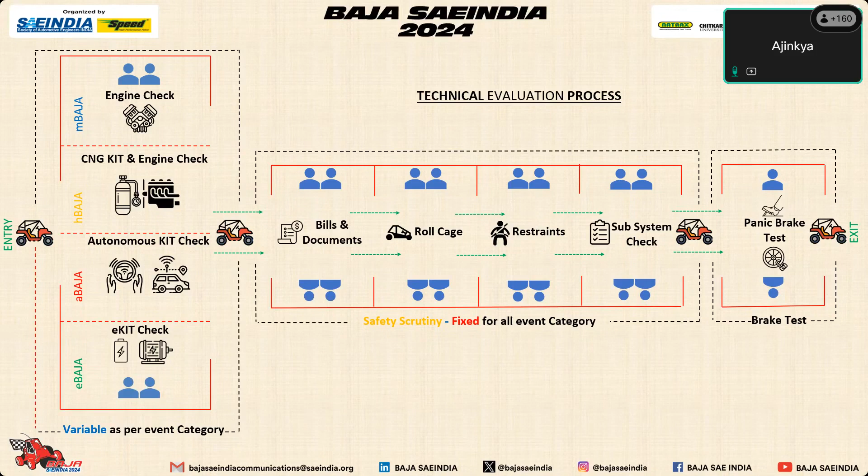This is because you get two TI check attempts, and a strategy we suggest you follow is that as you get two attempts, first get everything prepared before the TI. Your brake bleeding, etc., can be done on day 0 when you arrive. Once you have sufficiently prepared your vehicle and think there are no glaring issues, get in line for TI attempt 1, clear out max points, and report back and preferably get all the things you have messed up, all the things you have not cleared, fixed and rectified. Then on the first day itself, you can go for the second TI check, and in that second attempt, you can clear the remaining points. Because the points are carried over from the first TI to the second attempt, you can get your TI cleared and evaluated properly as quickly as possible.

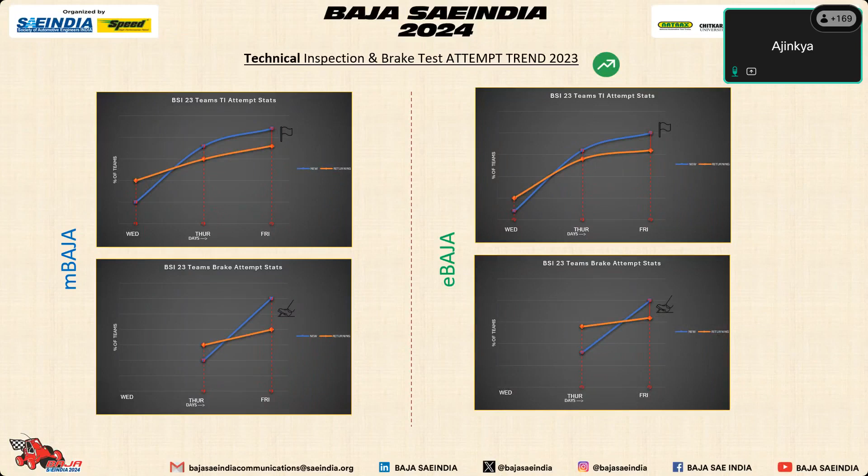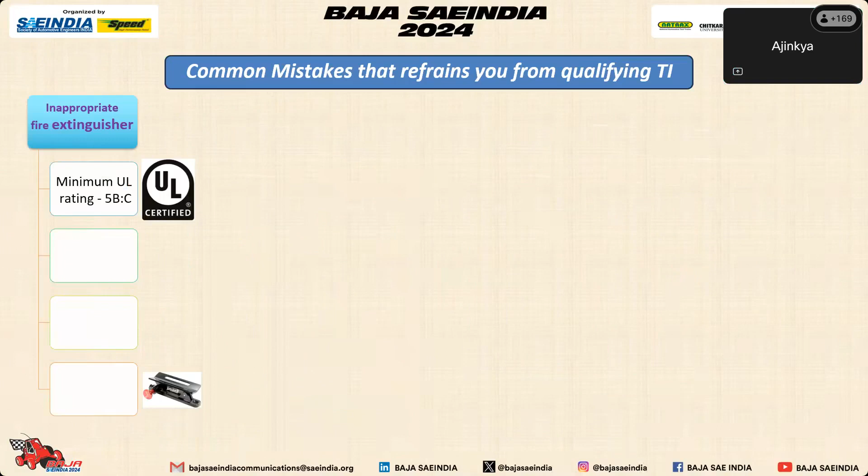Moving on to some mistakes we've observed teams make: the fire extinguisher part is being neglected. Teams should have a minimum UL rating of 5 BC, with proper pressure filled to the green dial pressure. For quick release, more than 2.5 inches of radial clearance is expected, and the mounting bracket should be Drake FireX MNT according to the rule book.

In powertrain guards, we have seen teams with powertrain guards fouling with the casing of rotary components, and flexible brake rotors without finger guards. The powertrain guard should properly meet rule book expectations. Also, having less than 15 mm of clearance between casing and any nearby roll cage member is not allowed.

Many teams we have observed do not have a proper splash shield, in which fuel that might spill over can still fall onto the equipment when poured over the splash shield. That is not expected - it is a safety hazard. We want teams to have proper sealing, grommet, etc. on the sharp edges. We want the splash shield to properly cover the entire engine and exhaust, so that fuel, whenever it spills, does not get onto the engine or the hot components.

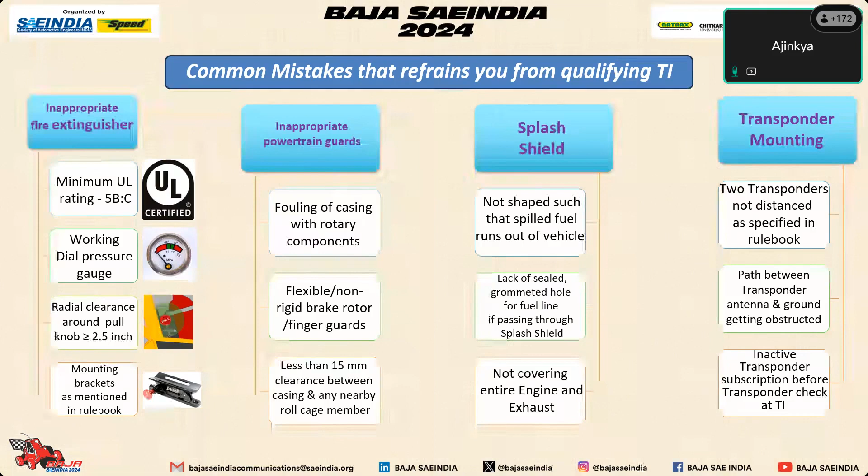Some points relating to brake lines as well - some teams do not have proper routing in their brake lines, so they might get pinched or bent to extreme during jounce and rebound, or during steering lock travel.

We also don't want there to be large cutouts in the firewall, with no grommet. There should not be any sharp edges or hazardous points for the driver, team members, or track workers.

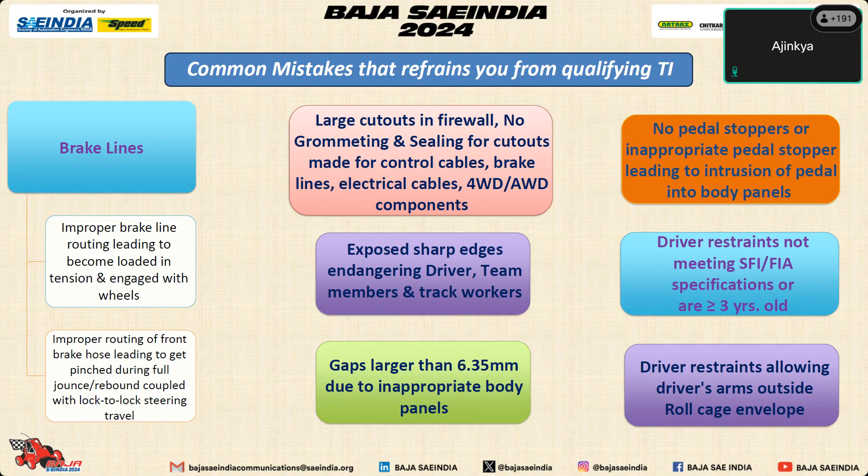Next slide, please. Ajinkya, the slide is changed. Yeah.

To provide proper thread engagement past the end of the nut. The vehicle brake lights shall be oriented to trailing vehicles and shine parallel to the ground or at a slight downward angle; brake lights angled or aimed above a horizontal plane are not permitted. No lock nuts at crucial points is also something we don't want teams to be doing. Heim rod end bearings should not be unsupported and should be strengthened using check nuts.

Accumulators are the only type of stored energy systems. We want teams to have proper PPE kits when the swapping activity is done.

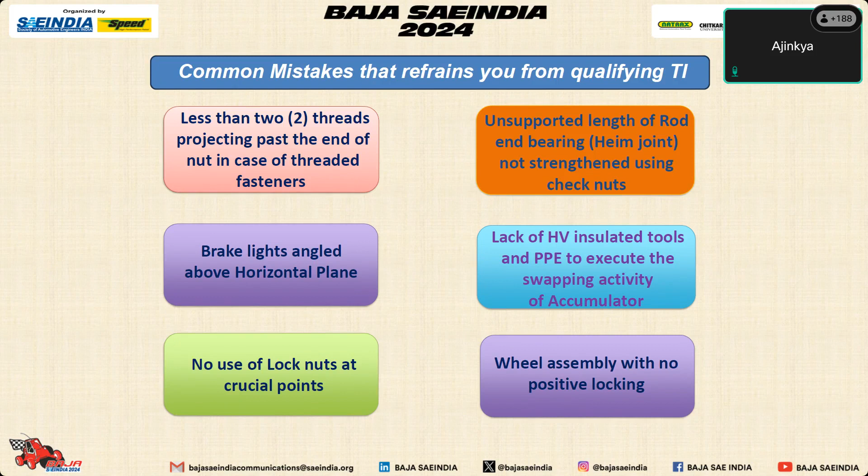In the BAJA SAEINDIA competition, this can help teams ensure that they are meeting all of the competition requirements and that their vehicle is safe and legal. Find any potential problems with your vehicle early on, and it can help you fix them.

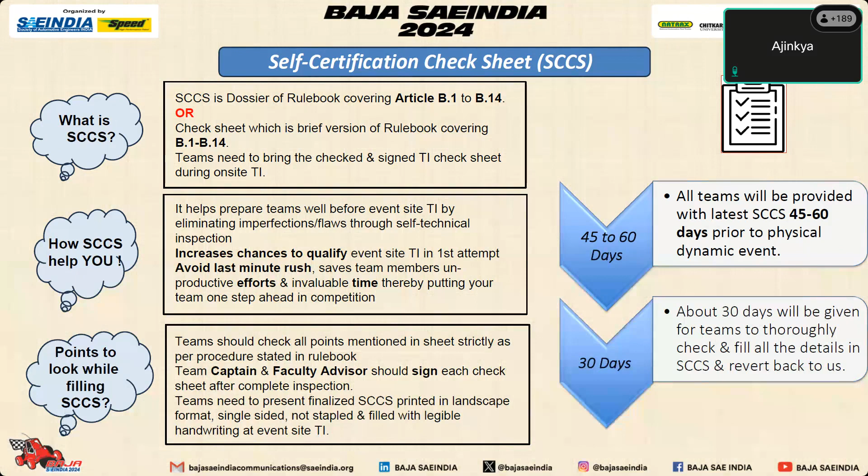Teams should check all the points mentioned in this sheet strictly as per the procedure stated in the rulebook. We want team captains and faculty advisors to have a signed copy of the check sheet, and teams need to present this finalized check sheet printed in landscape format, filled with legible handwriting, at the event site of TI.

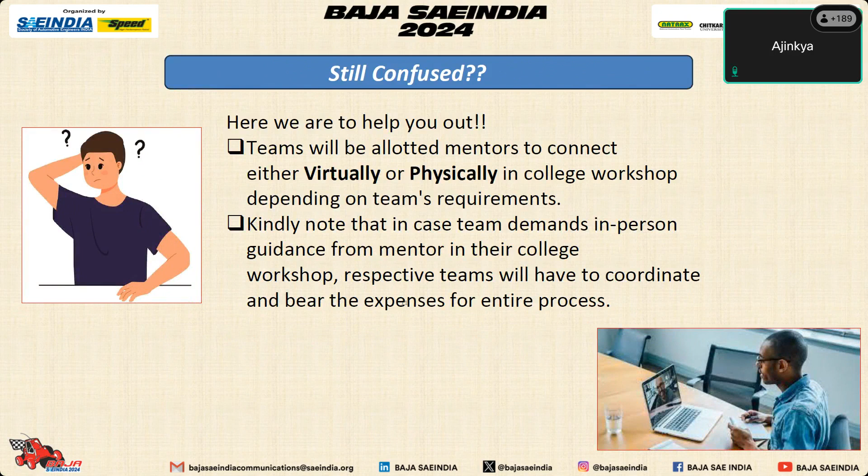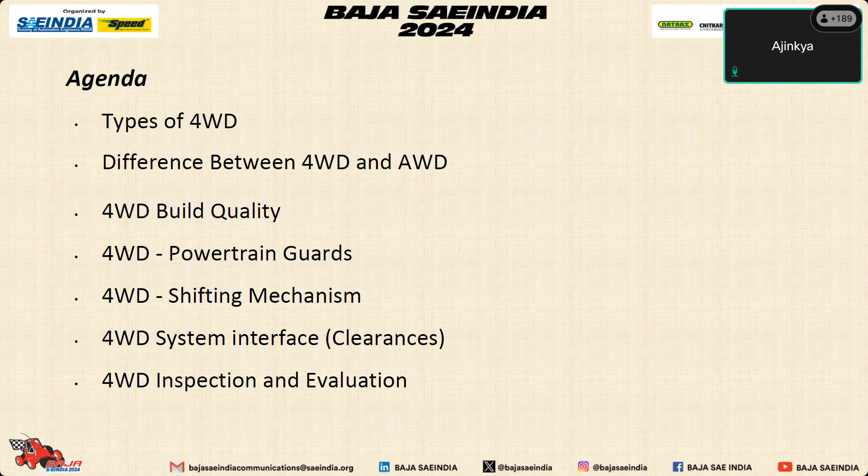The BAJA competition organizing committee has decided that it is going to be compulsory from the 2024 event for M-BAJA, and teams can choose for E-BAJA to be either two-wheel drive or four-wheel drive. We'll go over these points in the next few panels.

There are two types of four-wheel drives that we have seen teams perform: one is chain drive, one is shaft drive.

All-wheel drive and four-wheel drive are two different types of systems that we have been talking about. An all-wheel drive system is where all four wheels receive power at all times; this can provide better traction and handling in slippery or off-road conditions, and such mechanisms are typically used in cars or SUVs.

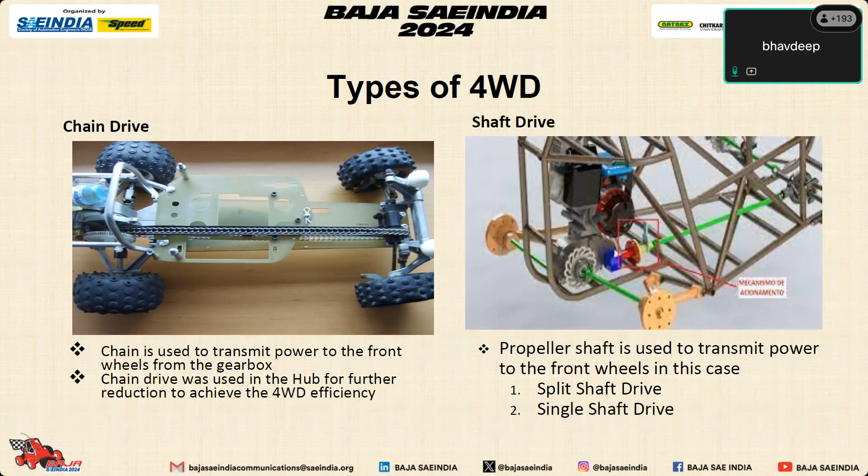So what is the difference between all-wheel drive and four-wheel drive? Four-wheel drive is a system that can be convertible to front wheel, rear wheel, or four-wheel drive. But when we talk about all-wheel drive, that is a full-time four-wheel drive only. This is the basic difference between all-wheel and four-wheel drive.

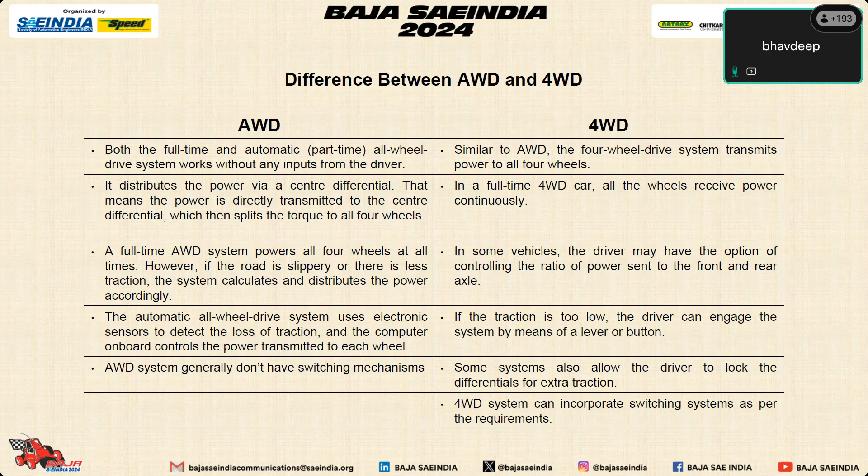There are also benefits to opting for four-wheel drive, along with some pros and cons while choosing any of the drives. For example, if you are facing low traction, you can change your traction to front or rear wheel, whichever requires higher traction.

How do we look into the build quality of four-wheel drive? The drive shaft axis should be steady. We have seen in past years that whenever teams opt for four-wheel drives, the shaft wobbles. So whenever you are designing your four-wheel drive, make sure the shaft remains steady while transmitting power, and smooth rotation should be there for all four wheels. Whenever you transmit power from rear to front, the rotation of all four wheels should remain the same. That depends on your design, and as per the rule books, you have to use standard fasteners.

And whenever you apply your brakes, the vehicle should stop. Whenever your four-wheel drive is engaged, if you face any fail-safe situation—like if the propeller shaft or chain drive fails—the safety of the driver during the vehicle operation must be ensured.

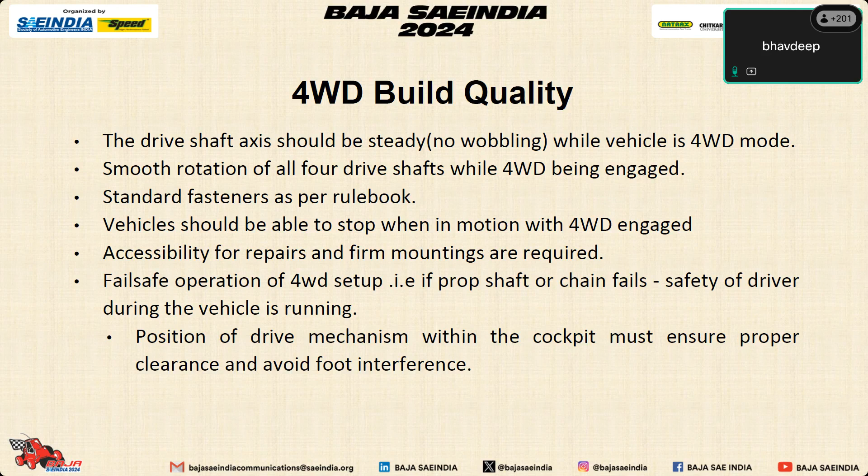As per the rule book, we have given rules for powertrain guards for properly mounting your drive shaft and propeller shaft. These powertrain guard rules apply wherever you are coupling your universal joint. Power transfer from drive shaft to front differential must be covered properly. Installation of drive shafts and hoops or chains must be ensured to ensure the safety of the driver.

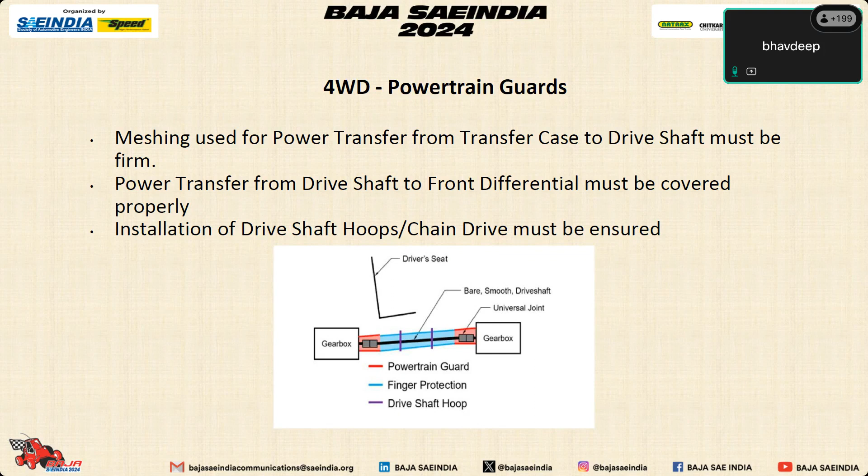Then we have given the option for a shifting mechanism. Teams can opt for any type: cable shift, mechanical type, or electronic type. For switchable four-wheel drives, there should be convenience of switching. If you have opted for a shifting mechanism in the roll cage, there should be no interference of the driver's knee or elbow with the switching lever.

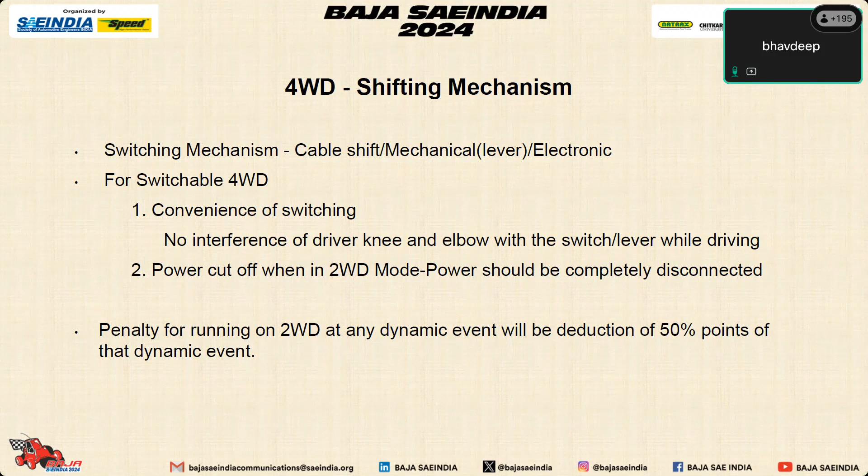Power should be cut off whenever you are shifting from two-wheel drive to four-wheel drive, or four-wheel drive to two-wheel drive. If you are running on two-wheel drive, there will be a penalty, as we have already mentioned that this year we are going with four-wheel drive compulsory. If any team is found driving on two-wheel drive, there will be a penalty—a deduction of 50% of points for that particular event.

So how should the four-wheel drive system interface look? The transaxle unit must be mounted with proper clearance from surrounding structures like the roll cage and firewall. Cutouts provided for the four-wheel drive must have proper grommet and sealing, as Ajinkya has already mentioned. Meshing and finger guards must be firm and properly mounted. These are the points a team should keep in mind while designing and building their vehicle.

There should be separation of cockpit space from the drive shaft, with clearance between the nearest roll cage member and the shaft. There should also be installation of a proper enclosure to cover the drive shaft, or the chain in case you are using a chain drive.

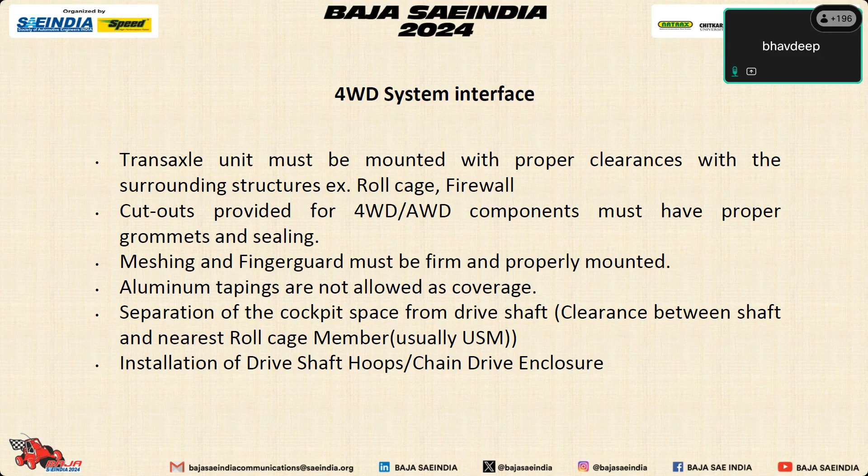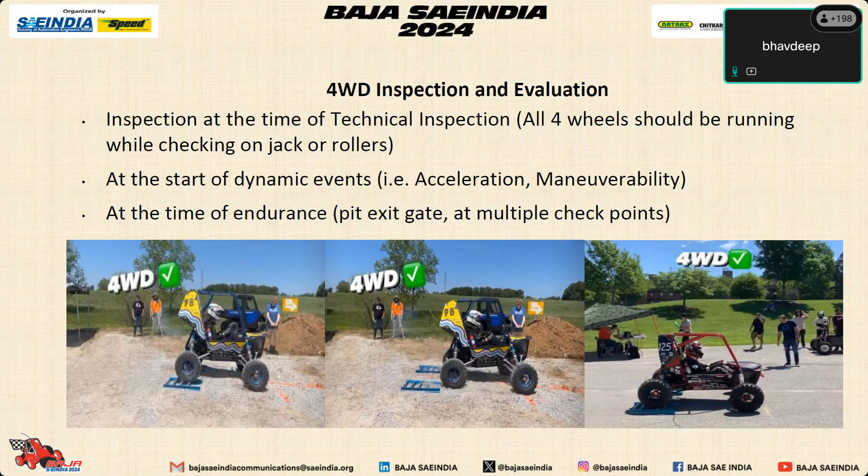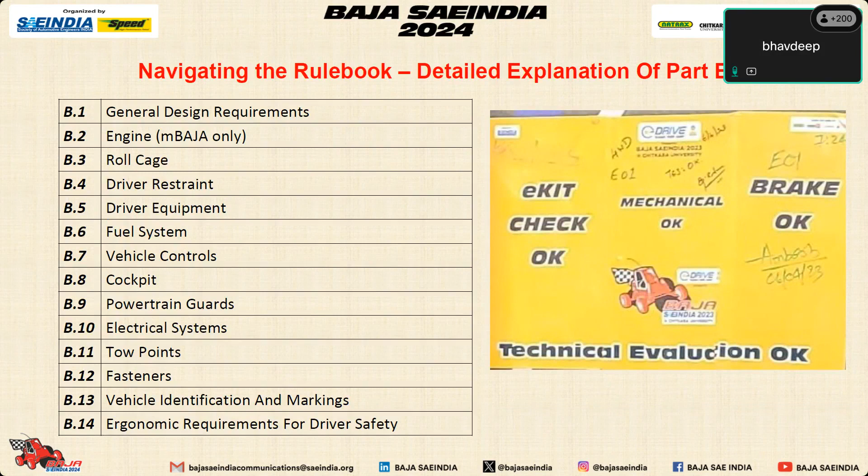Now let's go to the rule book and a detailed explanation about part B. So basically part B consists of general requirements. In terms of mBAJA, there will be engine requirements. Then what are the rules for roll cage, driver restraints, driver equipment. So all these topics will be covered in subsequent sessions.

So first we'll talk about the general design requirements. So in the rule book, what are the general requirements? So there are specific size limitations, with a maximum width of 162 centimeters; the length is unrestricted and the weight is unrestricted. So the team should consider that courses are designed for vehicles within these dimensions only.

The vehicle must accommodate a driver of 190 centimeters and a weight of 113 kg, and also meet the roll cage clearance and have accessible controls. So vehicles as designed by the students must use good engineering practice and operate safely in rough terrains.

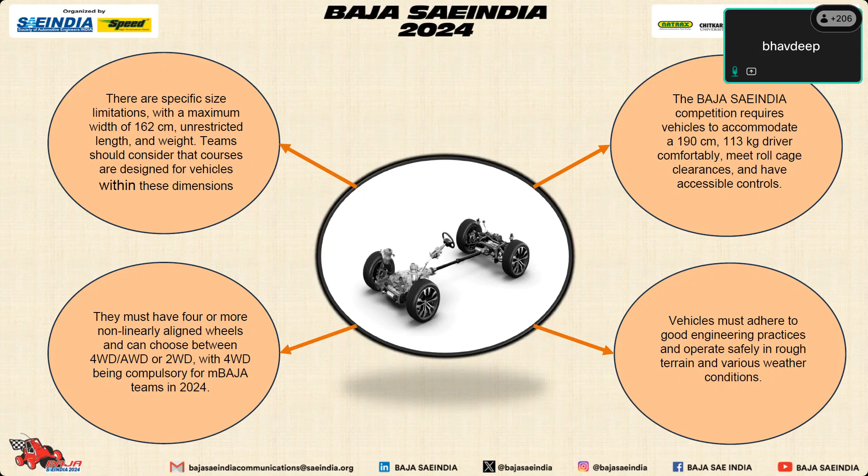So they must have four or more wheels, not in a line. You may choose two-wheel drive, all-wheel drive, or four-wheel drive. But in terms of mBAJA, four-wheel drive will be compulsory. What are the requirements for the engine? This is particularly for mBAJA.

So this year we are going to use a Briggs & Stratton 10 HP OHV Vanguard Model 19. So teams are advised not to purchase a new engine because this is a transition phase, as we have introduced two new events, aBAJA and hBAJA. So teams can use their older last year's engine as well. The only engine which can be accepted at the competition is the Briggs & Stratton model number, which is also already given in the rule book.

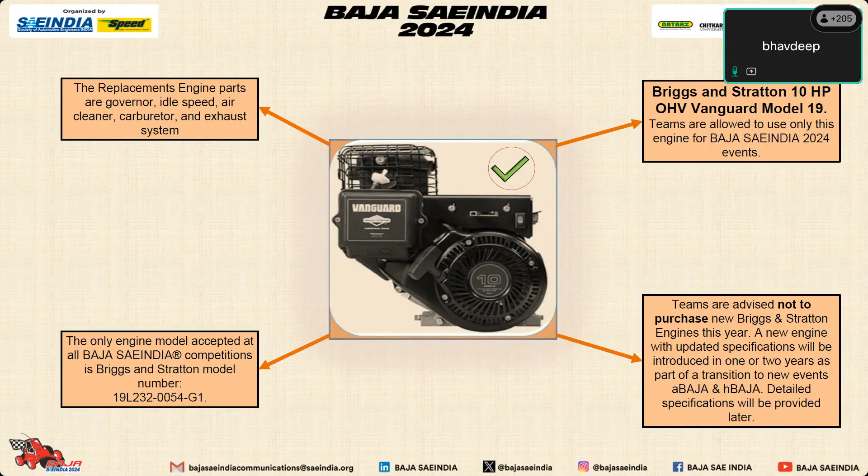So these are the ideal configurations of the engine. The complete exhaust system shall be located within the 100 mm perimeter of the vehicle. So these are the rules for the exhaust. Your exhaust should be a minimum of 100 mm away from the roll cage members.

Then the governor setting should be in hole position 5. It should not exceed the maximum RPM of 3800. It will be checked during the engine check as well as after completing your endurance. And your idle speed recommended by Briggs & Stratton is 1750 plus or minus 100 RPM.

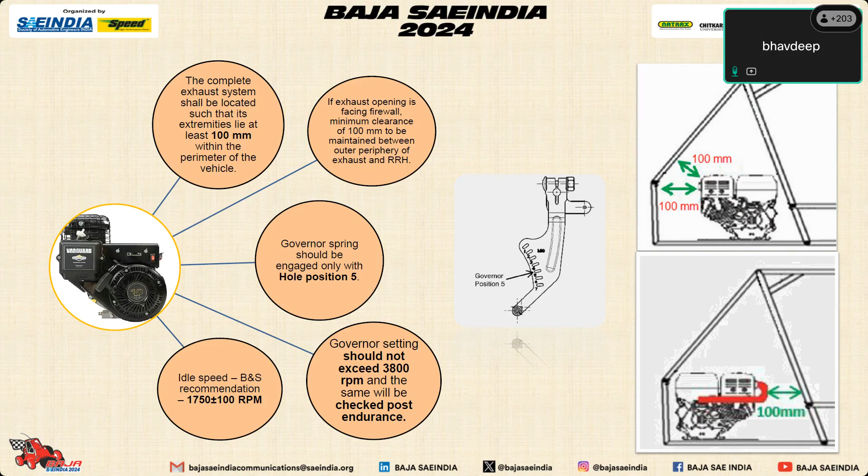Now moving towards the next session, which is covered by me, myself Bhavdeep Trivedi. I am a technical evaluation judge at BAJA SAEINDIA 2024, currently working as assistant manager at Gujarat Student Startup and Innovation Hub.

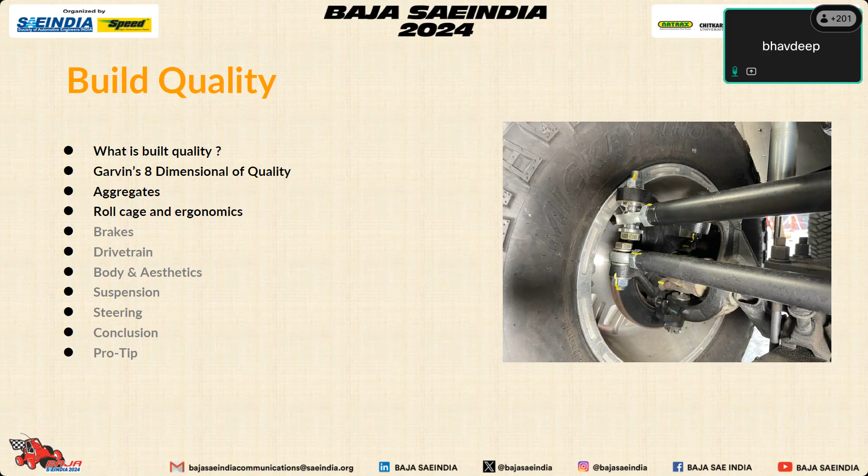Now, first, let's understand build quality. Build quality is a combination of functional as well as aesthetic aspects. Functional covers performance and reliability, and aesthetics is the appeal of the product. Both are equally important for a good build quality. The performance and durability of a vehicle depend upon build quality. Even the best design might fail prematurely if the build quality is not proper.

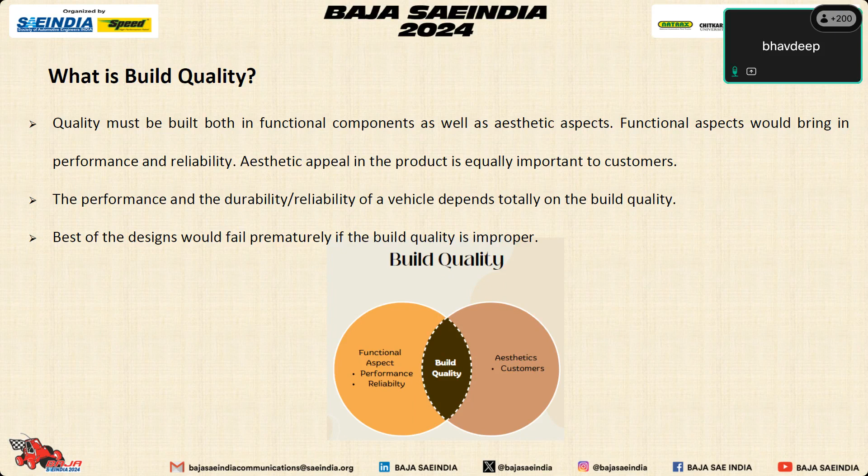Now, what are Garvin's 8 dimensions of quality? These are the most important points that all the teams can look into. These are the 8 dimensions through which you can have better build quality. First, performance: the performance characteristic describes the product's essential function. So whenever you are designing, you set up your performance. That is the first step.

Then features are the secondary part. If you are adding some additional features to your buggy, that is a secondary aspect. Then reliability, the ability of the product or service to perform as expected over time. Whenever you are designing any component, reliability plays an important role in the build quality.

Then conformance, how well you are meeting your specifications. Whenever you have decided on some specifications, after actually making it, how close to the specifications you have got. Then durability is basically a measurement of the product life cycle. Whenever you are designing any component like a knuckle or a hub, how much product life cycle is there?

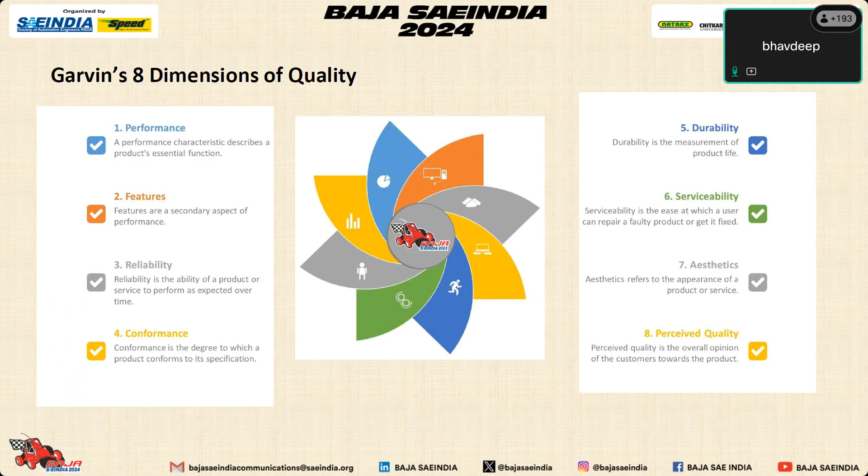Then comes the perceived quality. Perceived quality is the overall opinion of the customer. In terms of our BAJA SAEINDIA, this will be the opinion of the judges evaluating your vehicle: how they look at the quality that you have mentioned.

So these are the aggregates, on which you have to be very clear about the build quality. You can focus on the ergonomics, the roll cage build quality, then the different department designs, as well as the aesthetics of your body, suspension design, drivetrain design, and brakes design as well.

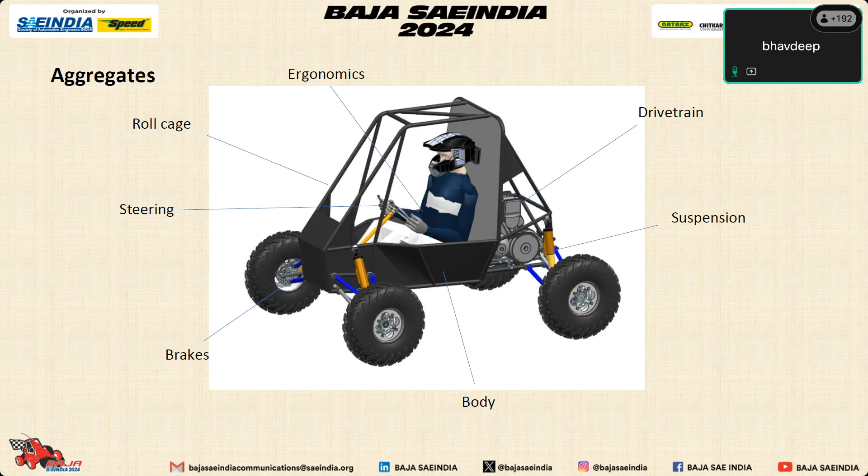Now, whenever you are going to design your roll cage, what are the points you must keep in mind? First is ergonomics measurement: driver ergonomics with proper clearance by use of the 95th percentile mannequin. This is one of the standards given by SAE. You can search for the 95th percentile mannequin and design your roll cage accordingly for better driver ergonomics.

Then the CAD design of the roll cage in accordance with the suspension hardpoints as well as the rule book. After making your roll cage design, you can go to the fixtures design, which ensures proper quality of the roll cage, and accurate jigs and fixtures need to be designed and fabricated. Low tolerance zones for high dimensional accuracy: there might be points where you need higher accuracy, which can be achieved by designing accurate jigs and fixtures.

Then you have to choose a proper welding process and proper welding parameters for the least heat affected zones. As you are doing the welding on your own, you have to be very clear while selecting your welding process. It may be arc welding, MIG welding or TIG welding, but whenever you select your welding process, you have to be very clear about selecting the parameters.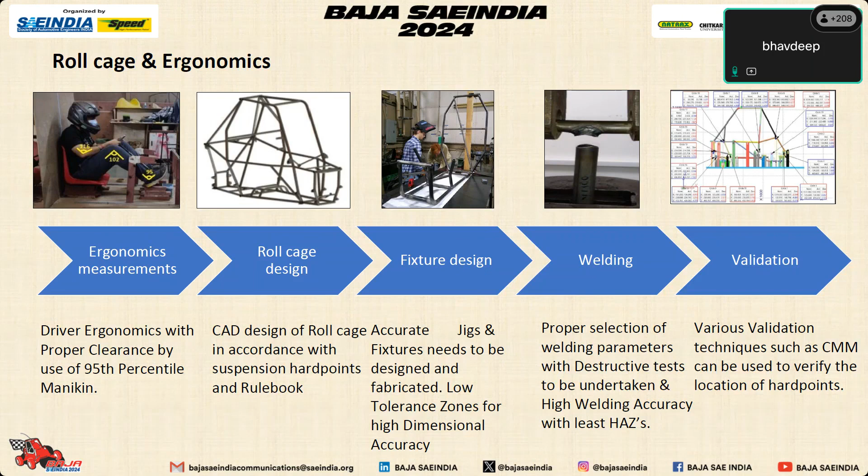Then after making your roll cage, you can validate your hard points by various validation techniques, such as CMM, that is, a coordinate measuring machine. It can be used to verify the location of the hard points. This will make your roll cage and ergonomics very clear as far as build quality is concerned.

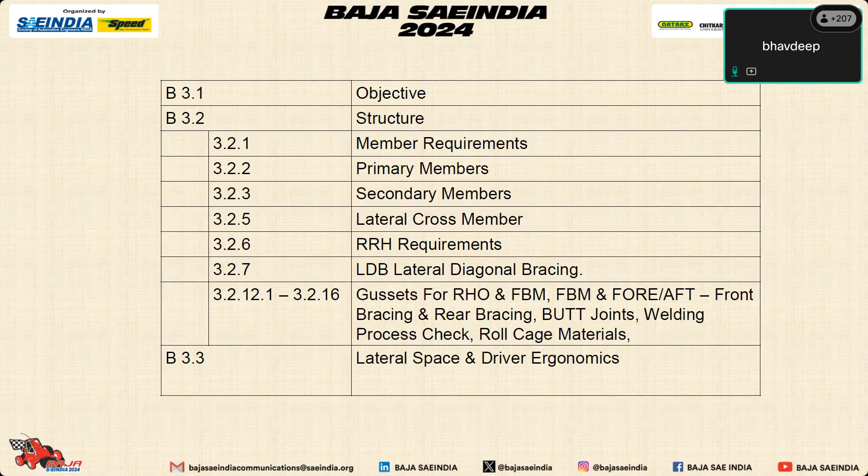Now let's come to the roll cage part. We'll briefly discuss the objective, structure, member requirements, then types of primary members, secondary members, lateral cross members and other roll cage members. First, the objective: we design a roll cage to maintain a minimum space surrounding the driver, designing and fabricating it to prevent any failure during normal operation, collision, or rollover.

These are the rules teams need to keep in mind: the roll cage should be newly developed every year. Use of an old roll cage is strictly prohibited, and a unique signature on the roll cage is required. The signature is stamped using a 6mm number punch on the driver's left side, and it contains the team ID, year of participation, and the car number.

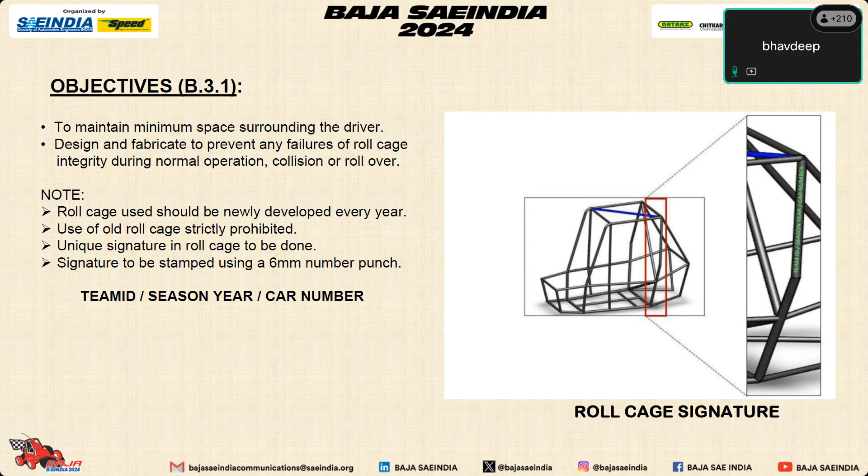Now, which type of structure can you use to build your roll cage? A space frame of tubular steel can be used. Joining can be done by welding or bolting; separate rules are given in the rule book if you opt for bolting. Welded joints must not be ground, sanded, or modified to prevent inspection. And if you are using bends in your roll cage pipes, they should not have wrinkles, kinks, or any detrimental deformation to the cross section.

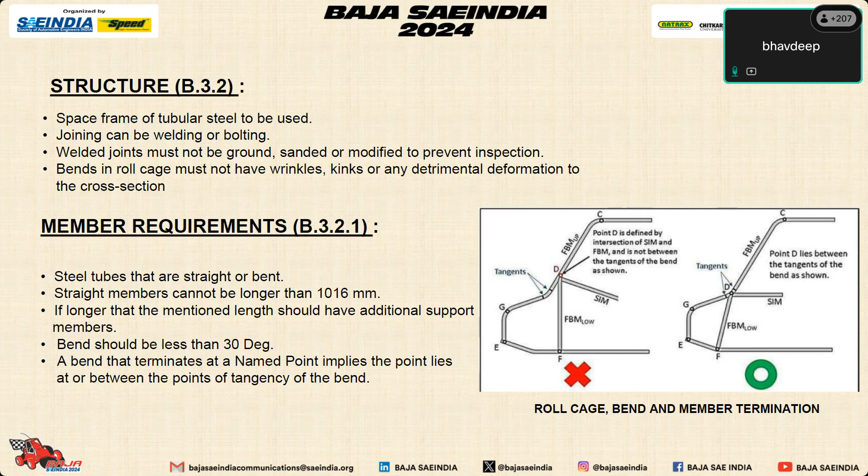Now, what are the member requirements? Steel tubes can be used, straight or bent, but straight members cannot be longer than 40 inches or 1016 mm. If longer than that, they should have an additional support member, and bends should be less than 30 degrees. These are the points a team can keep in mind while designing a roll cage.

These are the types of primary and secondary members: namely rear roll hoop, overhead, FBM, and ALC, CLC, DLC are primary members, while SIM, fore-aft bracing, and the underseat member are the secondary members of the roll cage.

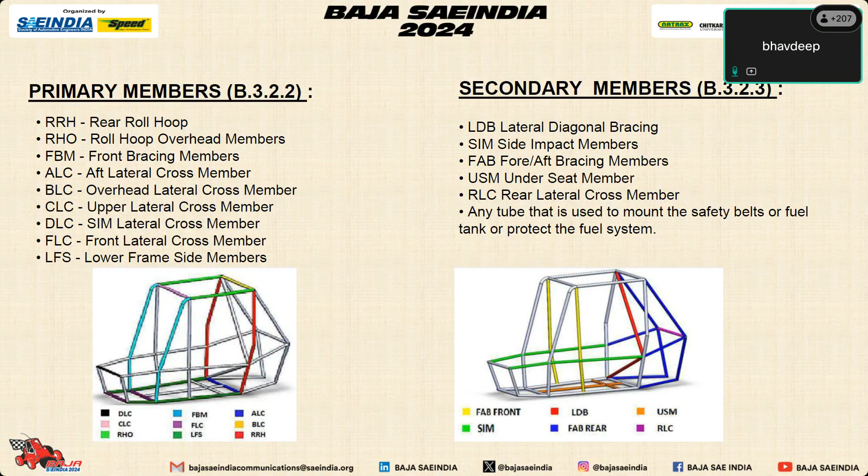So these are the important points to be noted while fabricating or designing your roll cage. The ends of the ALC member should be extended and left open for measurement purposes of the pipe cross section. Right. Any one member in the engine compartment area should also be left open for inspection. Roll cage material is to be used as per the rule book guidelines strictly. Third party certificates are required for material inspection.

All the roll cage members having bend radius greater than 6 inches must not be longer than 28 inches. So if you are bending your roll cage pipes, then the bend radius should not be more than 6 inches and not longer than 28 inches. The minor angle between two ends of a non-straight tube must not exceed 30 degrees.

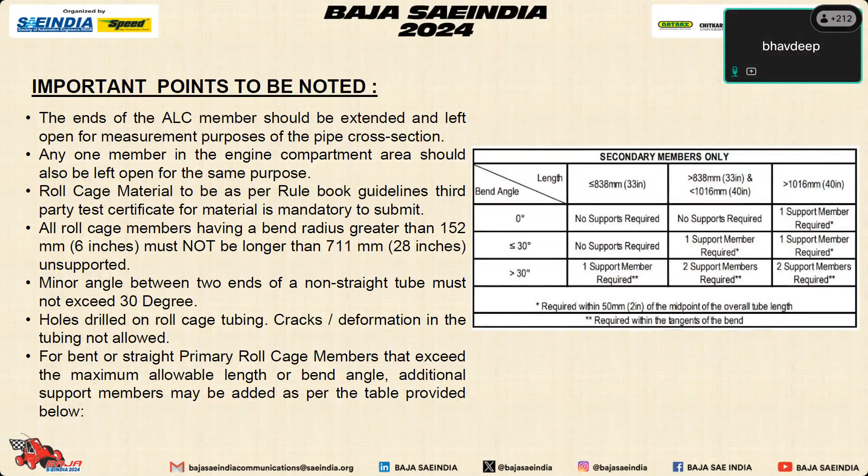So for bent and straight primary roll cage members that exceed the maximum allowable length or bend angle, there is a requirement of additional support members. This is the table given in the rule book. If your bend angle is 0 and your length is greater than 40 inches, then one support member is required. Similarly, the bend angle and length requirements are given here in the table, and accordingly you have to provide a support member.

So these are the RRH requirements. There are four rules for the rear roll hoop. The maximum allowed inclination from the vertical is 20 degrees towards the rear side. Second, minimum width of RRH at 14 inches above the driver's seat. So from the seat bottom, 14 inches up, there will be a minimum length of 32 inches. So it should be greater than 32 inches.

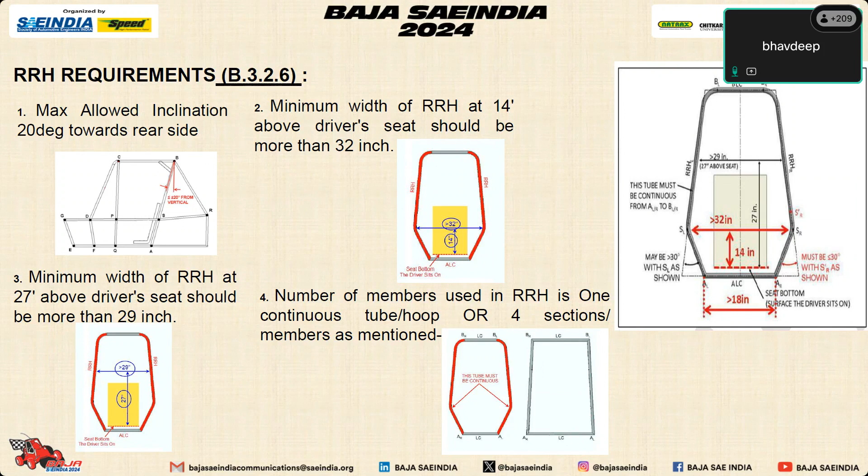Third one is minimum width of RRH at 27 inches above the driver's seat should be more than 29. So measuring from the seat bottom above 27 inches, the minimum width of the RRH should be 29 inches or more. And fourth one is number of members used in RRH. It can be a singular or a four section, but the sides of the RRH must be continuous.

Then lateral cross members cannot be less than 8 inches. This is not applied for ALC, because ALC has a separate rule of minimum length requirement, that is 18 inches. Other than ALC, teams can use smaller LCs, but they should not be less than 8 inches.

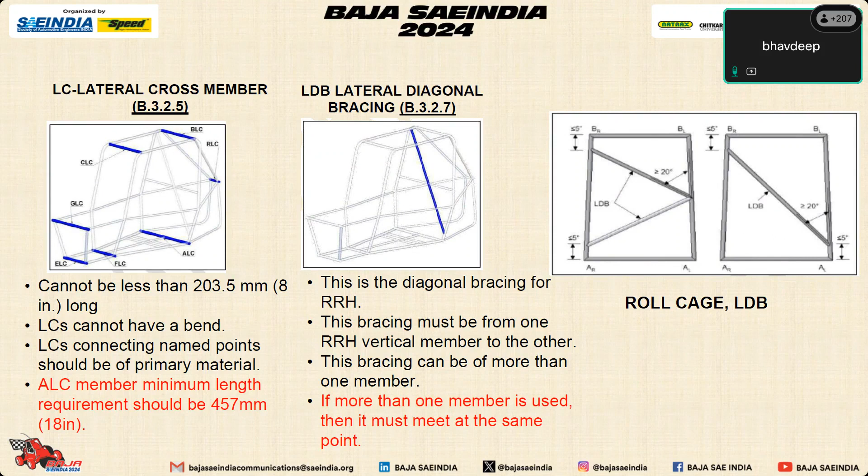Then the lateral diagonal bracing, this is a diagonal bracing for the rear roll hoop, and this bracing must be from one RRH vertical member to the other. If more than one member is used, then it should meet at the same point. The rules are given in the rule book that it should not have less than 20 degrees of angle, and the minimum distance from the B and A point should be less than or equal to 5 inches.

So if RHO and FBM are not comprised jointly by one tube, then a gusset is required. So what are the requirements for the gusset? The total weld length must be 2 times the tubing circumference, and if tube is used, then it must be a primary tube. And if plate is used, then the thickness of the material meets or exceeds that of the primary material.

So these are the roll cage templates, which are going to be inspected during the technical inspection. The teams can use the same template while making your roll cage at the college, and you can verify before coming to the technical inspection.

So these are the rules for FBM and fore-aft bracing. The front bracing member should be continuous, joining RHO, SIM and LFS. Here we have given two images of the same FBM, one having a vertical support. The maximum angle between FBM and vertical should be 45 degrees if there is no front FAB, and the distance from the FBM RHO bend should not exceed 5 inches. A vertical support from SIM to LFS is required when the distance is greater than 5 inches.

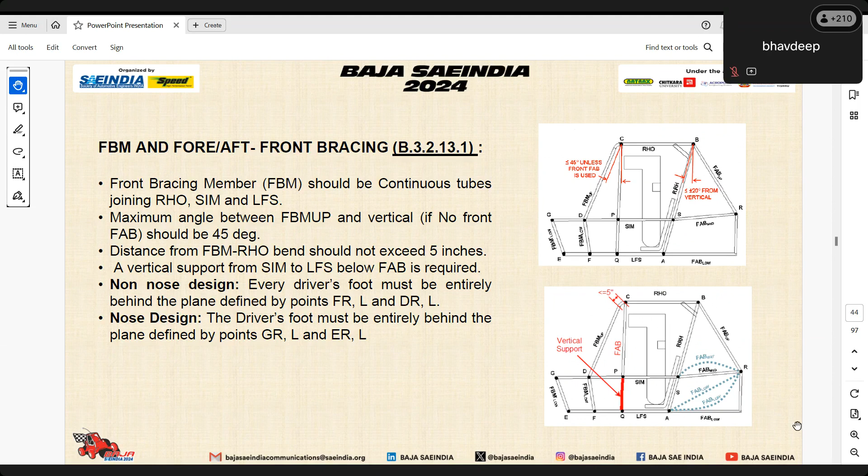So I hope my screen is now visible clearly. I got a call for that.

So we were talking about the gusset and RHO at last when the slide froze. So the roll cage template is also given in the rule book, and at the time of technical inspection, the template will be checked. So teams are advised to make a wooden template whenever you are making and fabricating your roll cage at the college. So you can cross verify before coming to the technical inspection.

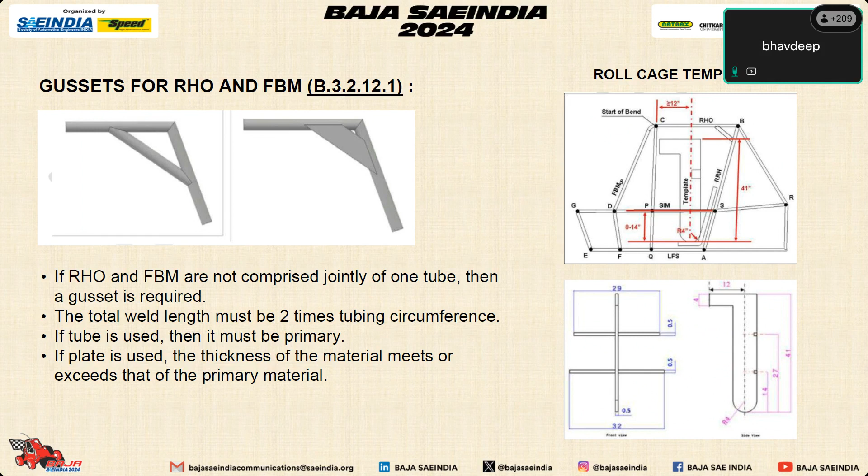Now, what are the requirements for FBM and front bracing? So the front bracing member should be a continuous tube joining RHO, SIM and LFS. Here we have given two examples, which are taken from the rule book. And the maximum angle between FBM up and vertical should be 45 degrees if you have not used front fore-aft bracing, that is FAB. Distance from the FBM RHO bend should not exceed 5 inches. That is also given in the rule book in the second image, so it should be less than 5 inches. And in case of the nose design, the driver's foot must be entirely behind the plane defined by GR, L and ER, L points.

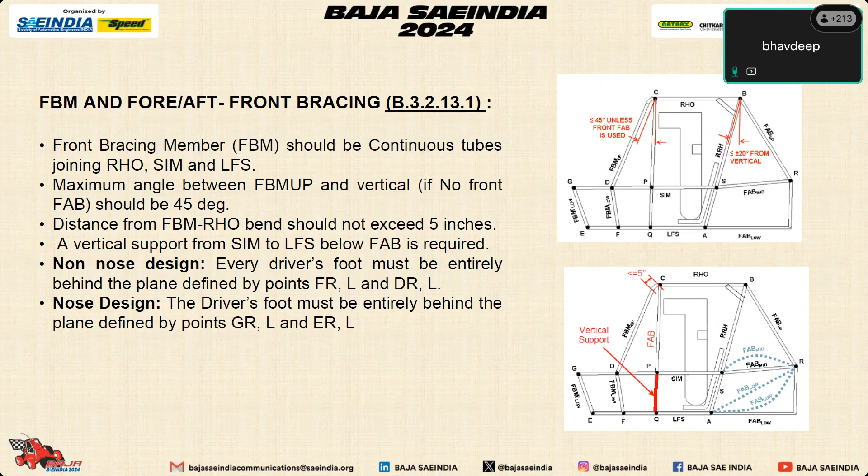For rear bracing, it will be triangulated with straight or bent members. So it may be a bent member or it may be a straight member. And the maximum length between attachment points, if triangulated with a straight member, is 40 inches or less. In case you are using a bent member, then it should be 32 inches or less. Minimum angle of triangulation should be 20 degrees. So these are the requirements for the rear bracings.

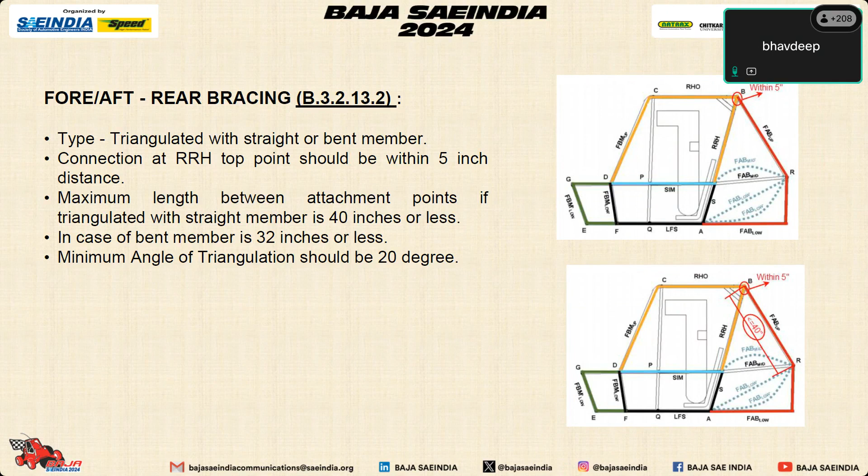Now, if you are using butt joints, then roll cage members which are made of multiple tubes joined by welding must be reinforced with a welding sleeve. This sleeve must be inside of the tube, not on the outside, and it must extend twice the diameter on both the sides.

Welding process check. So there will be two welding samples as shown in the figure above. And teams should have the following details on the samples: the college name, welder's name, date of construction of weld sample. So for participating in dynamic and endurance events, if the weld samples are not there at the time of technical inspection, the teams are restricted from participating in the particular event.

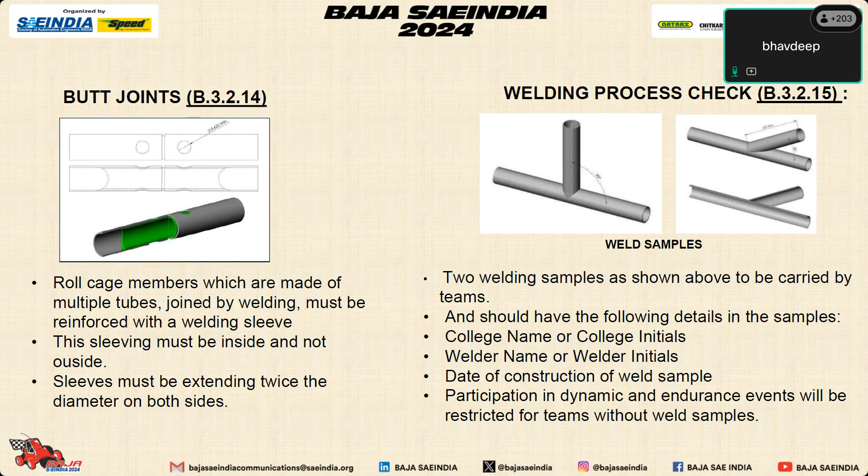Now these are the roll cage material requirements. So circular steel tube having outside diameter of 25 mm, that is 1 inch, and wall thickness of 3 mm, and carbon content of at least 0.18%. So this is the minimum requirement of the material that can be used for making your roll cage.

Or a steel shape with bending stiffness and bending strength exceeding that of the circular steel tube having the outside diameter of 1 inch and wall thickness of 3 mm, and the wall thickness of that particular steel must be 1.57 mm, and the carbon content must be at least 0.18% regardless of material or section size. The bending stiffness and bending strength must be calculated, and how to calculate that bending stiffness and strength is already given in the rule.

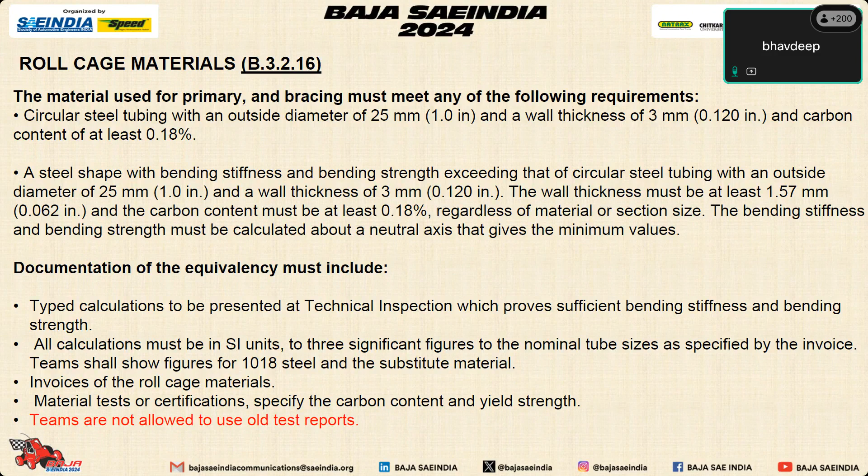What are the types of documentation required? So typed calculations to be presented at technical inspection which proves the sufficient bending stiffness and bending strength. So it must be higher than the strength of 1018 steel. All the calculations must be made in SI units to three significant figures to the nominal tube size as specified by the invoice. And invoices of the roll cage material have to be present at the time of technical inspection. Material test certifications that specify the carbon content and yield strength of the material are required. And teams are not allowed to use the old report of the roll cage materials.

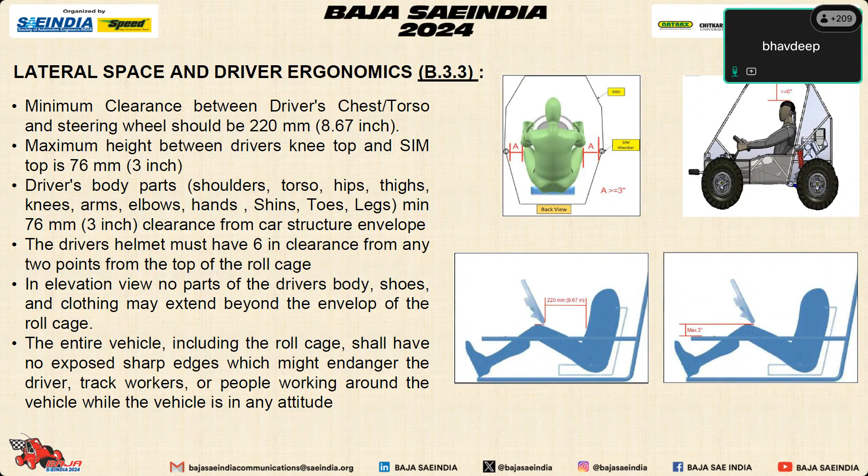Next will be presented by Mr. Amok. So just, yes, Amok, are you sharing the screen?